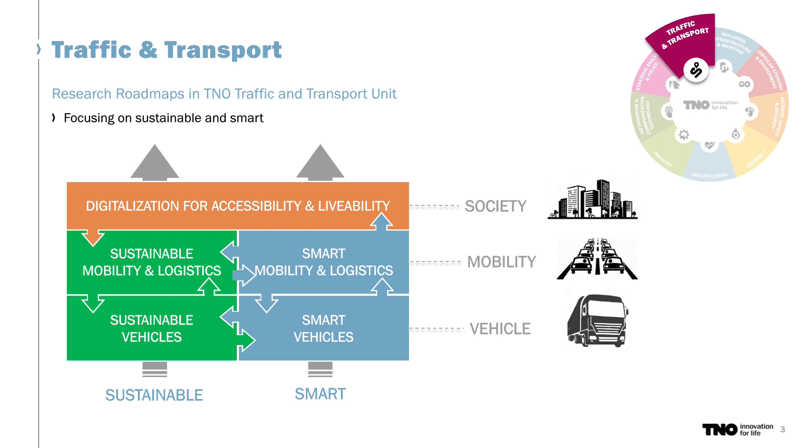Mobility level, where we look at smart and sustainable mobility and logistics, emission legislation, but also logistics, self-organizing logistics, for instance, or data-driven logistics. And at society level, we bring everything together in a way that is fit for the well-being of society. So to make sure that the mobility solutions we create actually benefit society as a whole.

Today's presentation, I'll be focusing on the vehicle level innovations. That is also the part that within Japan we work on most. But if you have any questions on the other levels, please come and see me during the drinks, and I will be happy to explain more about that.

So, what's happening in mobility at the moment? I just now noticed that this has a Dutch text in it. That's not a good thing. We have to change that.

But I think the picture symbolizes that we are in a transition phase. So we used to have all of these modalities, all of these transport means, vehicles, vehicle types that were optimized for our current mobility solution, or as we saw it, optimized, and everybody knows what they're using. But we need to go to a situation on the right that is totally different. Just some pictures here that might become truth, might not, like flying taxis or self-driving logistic robots.

We need to go to new solutions, but we don't know exactly yet what those solutions will be, because there's a lot of uncertainty in the mobility field. What energy carriers will be available? What type of infrastructure will be available? What legislation will there be? Will politicians enable certain technologies or stop certain technologies? So we're somewhere in the middle there. And the word chaos is up there, which is also the same in English, because of that situation where we don't know yet what the end situation is, we cannot stabilize yet.

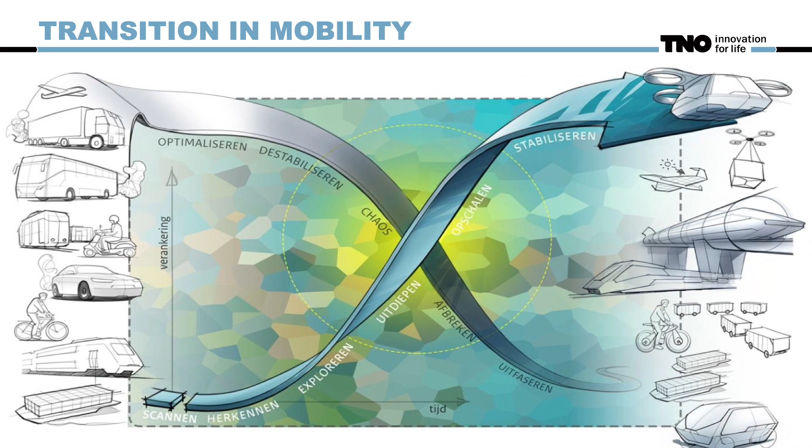So in that field, TNO is active and trying to be a partner for industry and public parties to make this transition successful, even though we don't know yet where it's going to end. So we're really working on optimizing for the future. We're working on upscaling and stabilizing solutions, and also helping with a controlled downsizing and phase out of current solutions that might not be needed in the future.

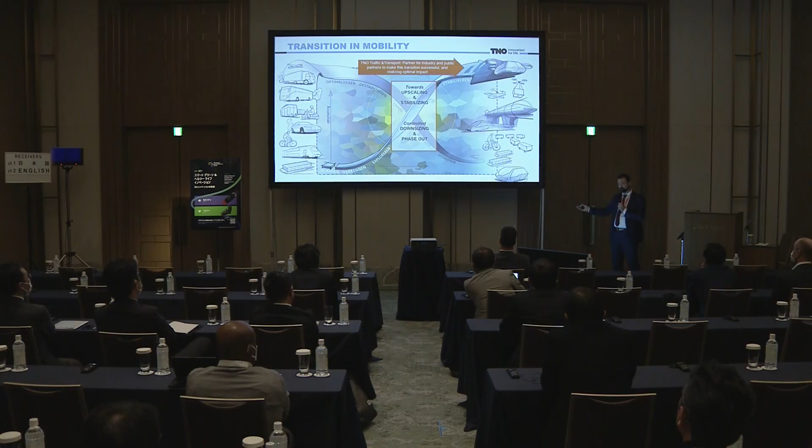TNO's scope of research is multiple years into the future. We don't work for next year, we work for 10 years, 20 years into the future. That is our real goal, to change the mobility system of the future.

So, to start with our sustainable roadmap, sustainable traffic and transport, our focus for this roadmap is 2025. Like I said, we look further than that, but these are the steps we're focusing on for that time span. So 4 core elements that we're working on here. We want to support the Dutch industrial R&D ecosystem, and of course the international ecosystem automatically with that, to realize sustainable mobility solutions on all levels I just described: vehicle solutions, mobility, and societal solutions.

We want to support the sector, and this is very broad, can be the automotive sector, can be the maritime sector, but also logistics, to create sustainable mobility ecosystems. And we do that primarily by creating partnerships. TNO is a not-for-profit organization, so we're not doing contract research with parties and then stopping. We're actually building this ecosystem, bringing together parties, and then together trying to get government funding, trying to get to the right solutions, and we try to really make something change in the world.

We also provide fact-based knowledge for effective policy making to our local governments, to Brabant, for instance, who's hosting today, to the cities in Brabant, but also to our national government and the EU. So TNO is very actively involved, especially on the sustainable side, on legislation. We had a big role, for instance, in helping set the Euro 7 standards. So we're really not just building technology, we're also creating knowledge and bringing that to our government. And we maintain state-of-the-art test facilities.

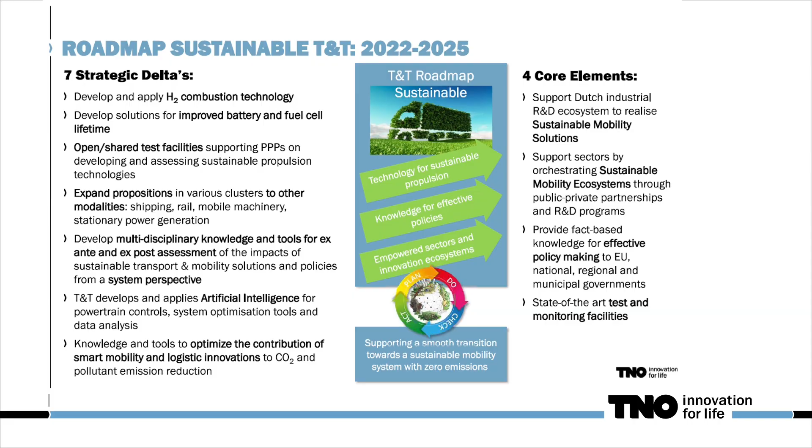Please don't read all of this, but it's just to give a little bit of a feeling.

If we're talking about making vehicles more sustainable, there's a lot happening on the policy side. So this is just an overview for the Netherlands on the things that are happening and have happened in the last years on policy. New Euro standards, Euro 7 coming out. European Green Deal from the European Union, that's dictating a lot on what we can do emission-wise. But also from the Dutch government, climate ambitions. Limitations on the sales of combustion engines for passenger vehicles, for instance. In the Netherlands, a very large issue, nitrogen deposition.

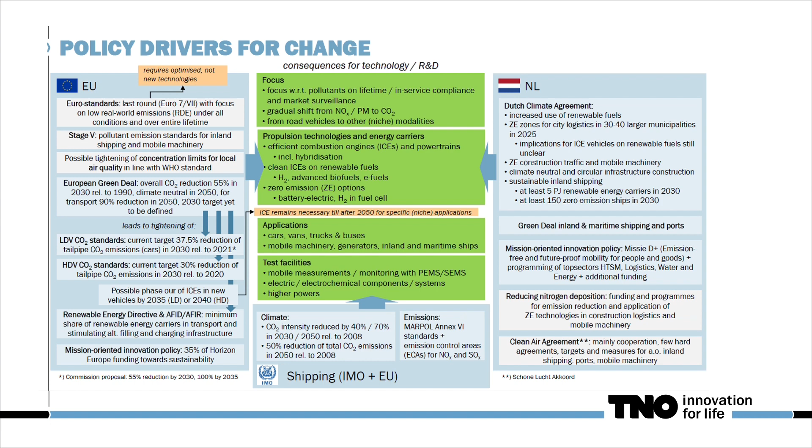So all of these things are happening, and the ecosystem, the private parties, but also the government agencies need to be able to support all of this. And it's quite difficult. So we're working there on a lot of changes, new propulsion technologies, new powertrain technologies, but also different applications because this policy drives certain directions. And TNO, with the combination between the technology that we have, but also the knowledge we have of this policy field, because we're active there, gives a unique position to really build these ecosystems with the private parties.

For us, on the sustainable side, we feel strongly that there needs to be a push to diversify the powertrain solutions. What I'm trying to say is there's not going to be, at least until 2050, a single solution that will support all modalities. Just focusing a little bit on on-road, especially heavy duty, we can see that there is not a single solution - energy carrier-wise, infrastructure-wise, and powertrain-wise - that will bring 100% clean powertrains to the roads by 2050. There's simply not enough of one source available, maybe not enough electricity, maybe not enough rare materials to build these systems. So we feel strongly that we need a mix of technologies that will meet the goals set by the policy, set by the transition, to be able to actually have the heavy-duty market function.

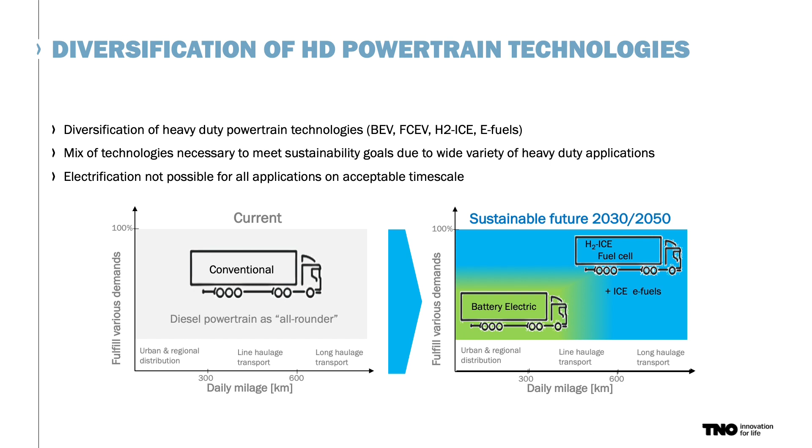A lot of times there's talk about electrification, and we absolutely believe that's a big part of this solution, but it's not going to be applicable for all solutions, in all markets, in all countries. So what we propose to go from the current situation, where the diesel powertrain is the all-rounder energy source for almost all heavy-duty transport, to a sustainable future in 2030, is to diversify. Just as an example, maybe in the urban regional distribution field, go for electrification, make smaller trucks, make them electrified.

But then looking at the long haul side, hydrogen, either in combustion engine or fuel cells, could be very relevant. We could make this picture much more complicated by adding additional axes. The main message I'm trying to say here is we shouldn't bet as a mobility sector on one horse. There will be multiple solutions.

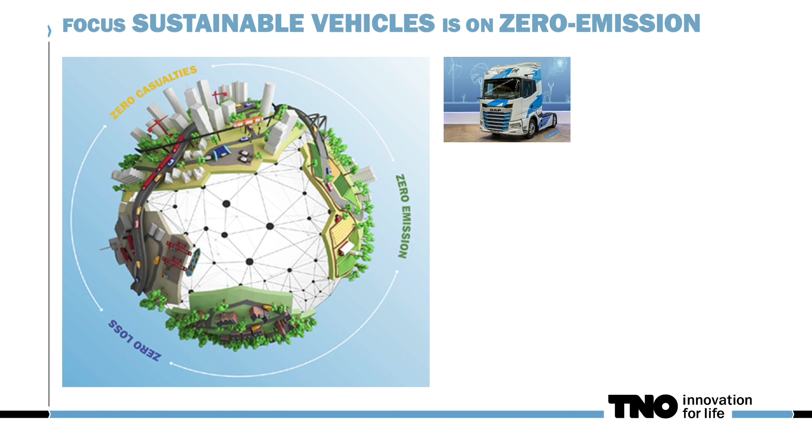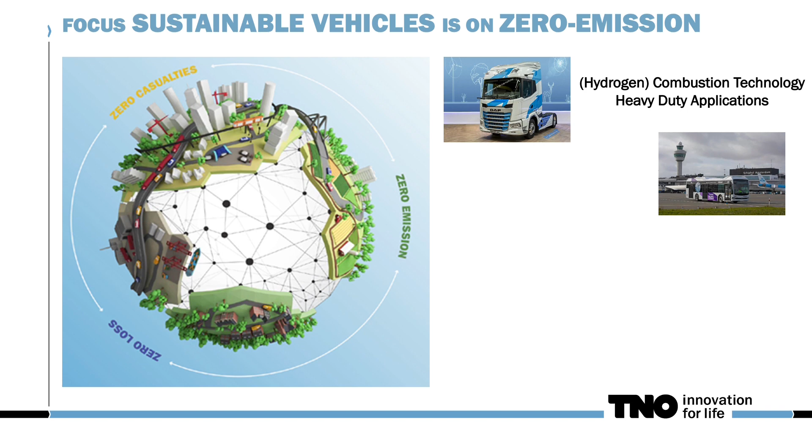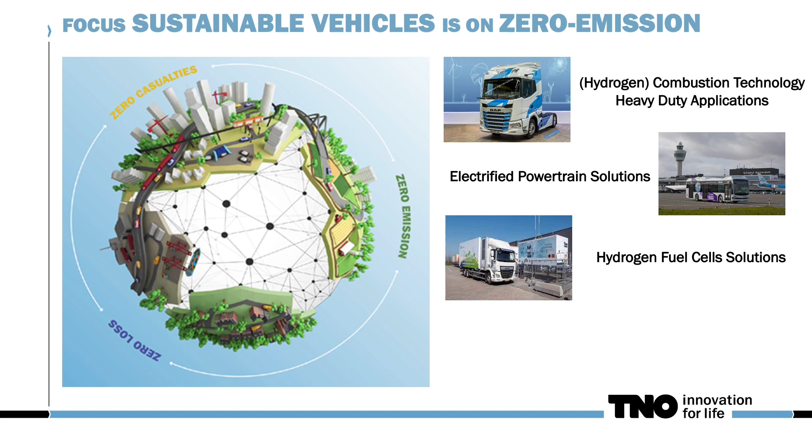TNO tries to facilitate this by having knowledge and working on all of those powertrains. I presented this very briefly in my previous presentation. We work on hydrogen, both for combustion engines and fuel cells, on electrification, batteries, energy management, all of those things. But we also maintain state-of-the-art facilities to prove those powertrains. So a little bit more detail on that.

We believe that the vehicle powertrain should be optimized for its usage, for its operational domain, so to speak. And we can do that because we have in-depth knowledge of the vehicle powertrain, individual components within that powertrain, and also the vehicle in practice, its interaction with the mobility system in general. Again, on all technologies.

We optimize with that knowledge the next generation powertrains, and we focus on the transition from fossil fuels to renewable fuels. We're not saying keep doing combustion engines the way they are used now, but use these technologies to make a transition. If you create fuel flexibility in your system, then it's going to be much easier to get to renewable fuels.

Energy usage, emissions, and total cost of ownership, we also optimize on those. In the end, of course, total cost of ownership is very important for the end user. We can make very nice emission-free solutions, but if they're not affordable for an end user, a shipper, a bus company, it's not a solution that we should consider.

So focus on hydrogen combustion, battery electric systems, fuel cell electric systems, and hybrid combinations of those. I'll get into the hydrogen combustion research a little bit more.

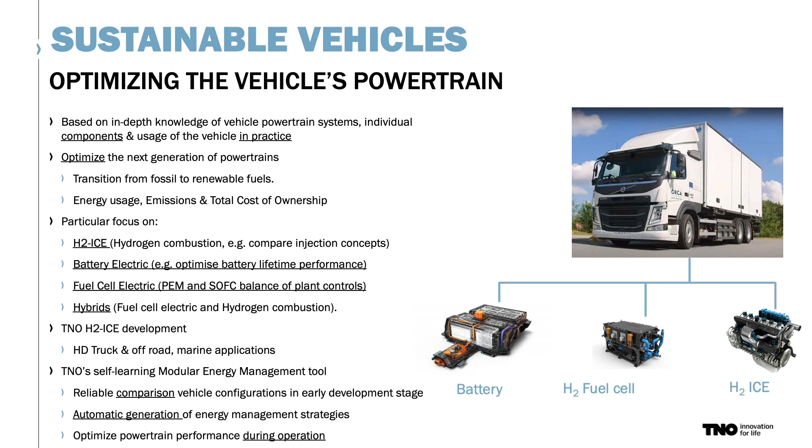We've created a self-learning energy management tool that gives input in the development phase by creating reliable comparisons, so you can choose the right configuration. It automatically generates the energy management strategies that can then be used in the ECUs of the systems to actually optimize on the road in the vehicle. This is quite an important one as well.

So like I said, a little bit more on hydrogen combustion. We believe very strongly that we need to make usage of the already mature and proven technology of combustion engines to be able to use a very important upcoming energy carrier.

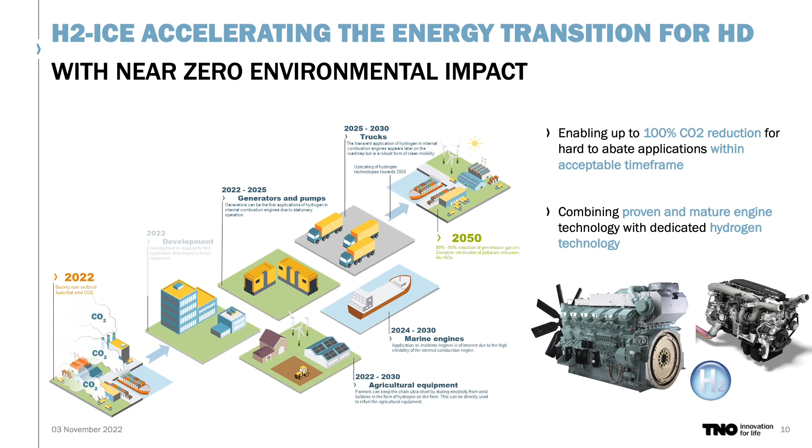In Europe, it's already been mandated by the European Union that there will be hydrogen available for the mobility field. If we look at the current development in fuel cells, we think it's unrealistic to believe that all of that hydrogen can be used in fuel cells for heavy-duty applications. This is due to the maturity of the fuel cells for those kinds of applications, but also things like the materials that are needed, and the recycling chain of those fuel cells.

So we believe strongly that we need another way to actually use that hydrogen and use its CO2 reduction potential, because even in a combustion engine, there's no CO2 output. So we think: use the combustion engine. It's already there, we can make it very clean. The only thing that you need to take care of in hydrogen combustion is the emissions, because if you burn hydrogen, you don't get CO2, but you can still get nitrous oxide emissions, particulate emissions. But with very clever technologies, we can bring that to near zero as well.

And you have a great way of transitioning - from maybe fuel cells in the future, maybe battery electric systems in the future - but to already use that hydrogen when it becomes available. So the roadmap we are following for that is on the slide now.

We're developing these engines currently, and we're going to roll them out first in more stable, simpler applications like gensets, generators, pumps, agricultural equipment, maritime engines, which also run more in steady state. Then in the near future - we're talking 2025, it's not that far away - we're already working with OEMs in Europe on rolling out hydrogen combustion as an available technology in 2025 for dynamic applications. There's a lot on this slide.

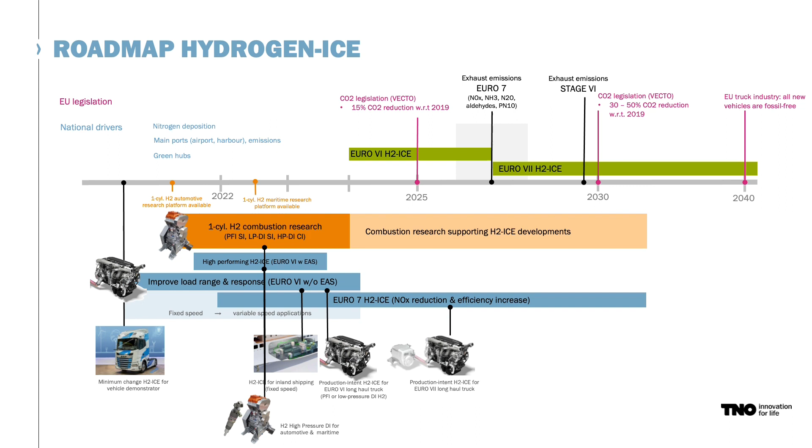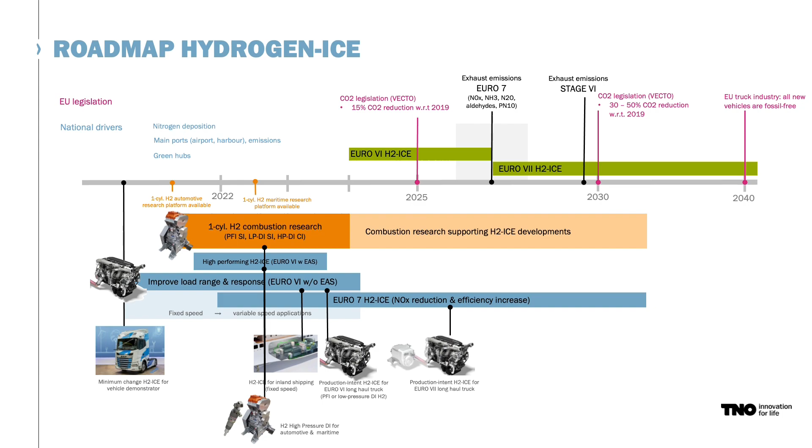We do that by combining this research with partnerships with OEMs worldwide to try to roll out this technology as fast as possible. What we expect is by 2025 to have a Euro 6 vehicle on the road that is feasible and can be used already, and then very shortly thereafter to have the Euro 7 vehicle available so we can meet all the legislations required for this technology.

The Euro 7 legislation has come out already. It has very low particulate and NOx limits, so it's going to be a challenge. The way we're going to do that is by running the engine not spark ignited, but dual fuel, for those of you that are interested in petrol or combustion engines.

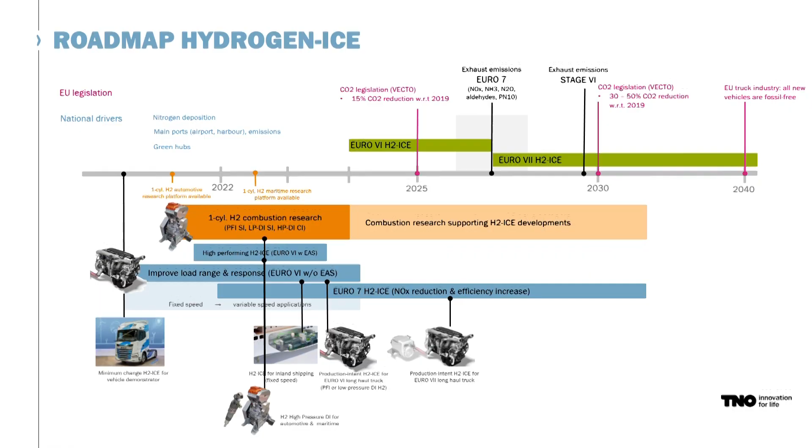So what kind of activities are we doing to meet that roadmap? One of the things we're doing for our partners is platform conversion - using the existing platforms of the OEMs and helping them re-engineer them for hydrogen. That's always a partnership. We don't build our own engines, but we can work with engines from third parties or from OEMs themselves to convert them.

We have the test facilities to validate those setups, to do repetitive testing. We also have the abilities to do long run hydrogen testing, so with high capacity hydrogen flows, we can do all of that in our labs.

We're also doing experimental research. You can see here, it's maybe a little hard to see, but our one-cylinder setup is for a heavy-duty application-sized engine, where we do all the testing for one cylinder so we can actually see what's happening. We also have a much bigger one-cylinder setup for maritime applications where we can do much bigger volume.

And there we do physical testing and simulations, compare those to come up with the actual models, and do the dimensioning and testing required for these conversions, but also looking forward - what would be the next step, how do we design our next engine?

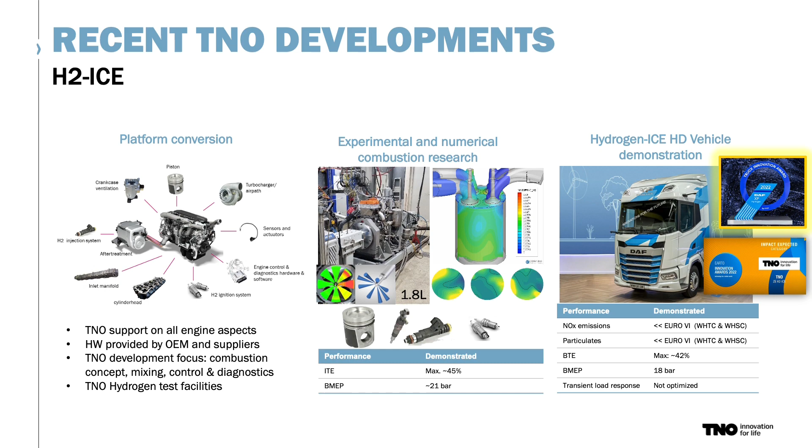So already, just for a little bit of a feeling, we demonstrated below Euro 6 NOx and particulate emissions with a brake thermal efficiency of 42%, which is not diesel equivalent, but high enough. The only thing we haven't done yet is the transient load response - we're not set up for dynamic applications yet, which is a big challenge to fix. We have a very nice facility - you have to believe me for it now.

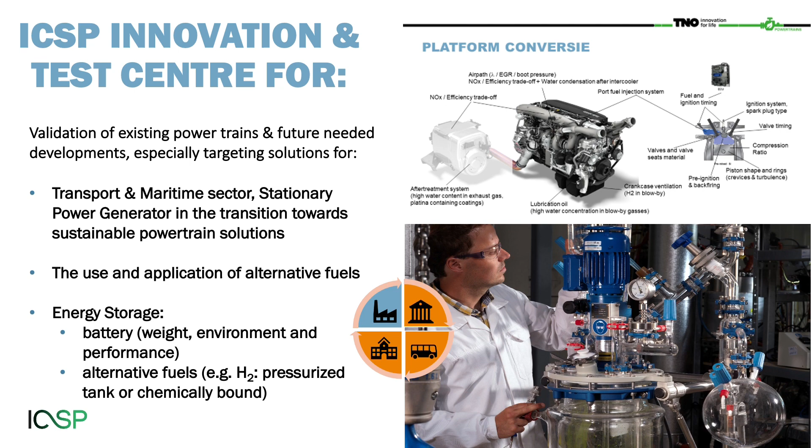But just to show you, skip to some slides here - just to give you a little bit of a feeling, our facility does anything from climate altitude testing to real world emission testing on the road. We have all kinds of fuel infrastructure, a very nice facility. If ever you're near Helmond, contact me and we'll arrange a tour.

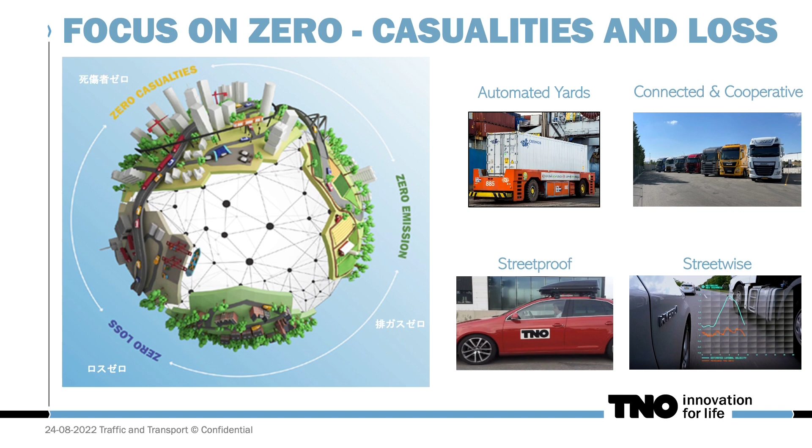Smart vehicles then. On the smart side, we already presented our focus areas, and I want to give some more details there. Connected and cooperative, communicating vehicles, linking vehicles with road and data infrastructures and each other, so cooperative driving, automated yards, looking at localization, world modeling, planning and control technologies, and street-proof and street-wise, which I always like to name as one thing. They're two separate focus areas, but I think they're both equally important.

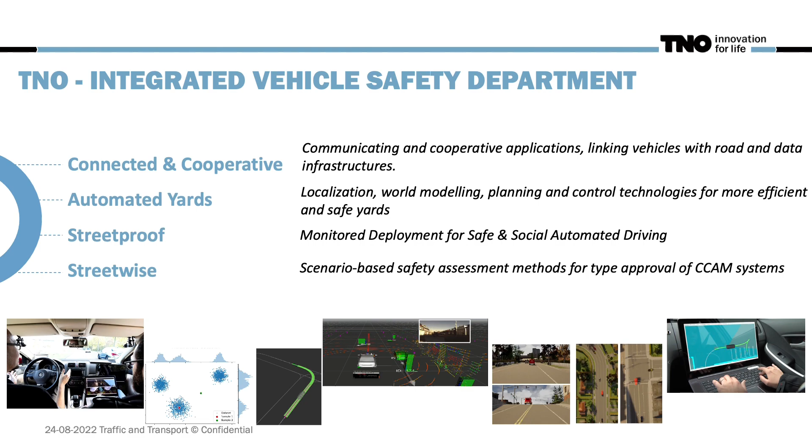Street-wise is about getting vehicles designed in a safe way and getting them approved to be on the road for autonomous driving systems. Street-proof is about keeping them safe and monitoring the deployment, making sure that even after software updates occur, the system remains safe.

We always work in the so-called V-cycle, which is very familiar to OEMs. We start, of course, at specification, work towards implementation of our technology together with our partners on vehicles and also at system level, test that, and make assessments, also on urban level.

This picture shows an urban assessment tool we have, where we can actually see, if we deploy this technology, what will happen in the city, what will happen with the flows of traffic, with emissions, with noise, all of those things. Then we use safety monitoring again to say, okay, if the solution in the assessments proves to be viable, is it still safe enough? And that sometimes means we have to change the specifications and go through the entire cycle again.

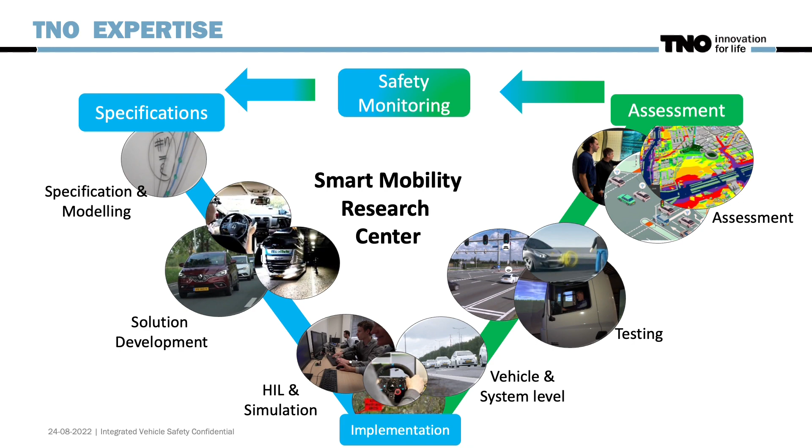Our smart mobility research center is something we're currently building in Helmond. It's partly a physical location, a building, but it's also partly an on-the-road system. So a lot of test vehicles are deployed there.

We're working on all kinds of fields there. We have smart infrastructure available. We have instrumented roads around Helmond that have additional cameras and communication systems where we can actually do tests on the road. We have special vehicles driving around that do recording of all kinds of scenarios.

We call that Streetlive. They're actually instrumented with additional sensors, and we use them to record actual situations on the road. We have test vehicles available, multiple types - just some pictures here, the Renault car labs and DAF truck labs that we have, which we can use to do on-road testing.

We have a large facility with hardware and software in the loop where we can do simulations with hardware components included in the chain. And we have a driving simulator available here that we can use for human-machine interaction, for instance, the handover process for level 3 automation or level 4 automation.

One thing not on this row, but good to mention here, is that we also have a large facility that is on human well-being in vehicles. So when we're talking, for instance, about motion sickness and well-feeling, if you make an autonomous system, you also want to make sure people feel safe in it and feel good. If the system really does weird braking, you can get nauseous.

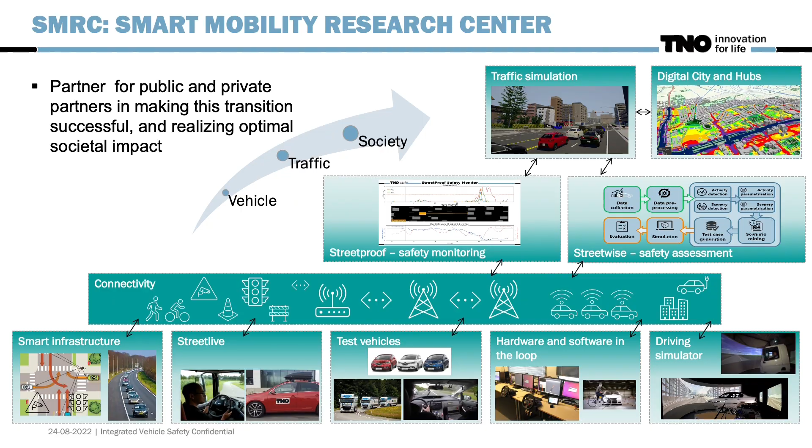We do our safety assessment tool chain for Streetwise. Further on top of that, we can do traffic simulation and digital city simulation, bringing together all of those test facilities. For instance, if you want to test one of your algorithms or your own vehicle, we can bring that into the test facilities and actually test it through the entire chain, showing that it's functioning well within traffic or that it's a good solution for a city.

This facility is partly government funded, by the province of Brabant, by the way, so that's very good to mention here as well - we're very happy with that support. But it's also very much a partnership with private industry. And that was it.